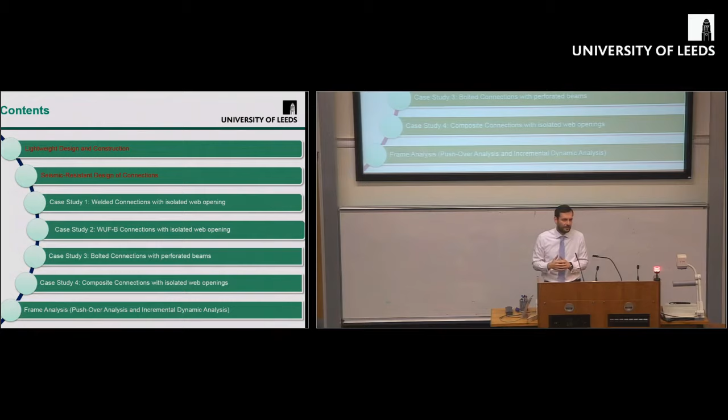I'll try to keep to the surface of the research and not go into great depth, but get the main message out of it. The contents of the presentation, I will try to engage two different concepts. I will start from the design of perforated beams in lightweight construction, and then bring into the discussion the seismic resistant design of connections. I'll try to engage these two through four different case studies, and then conclude with some main messages that we have at the moment.

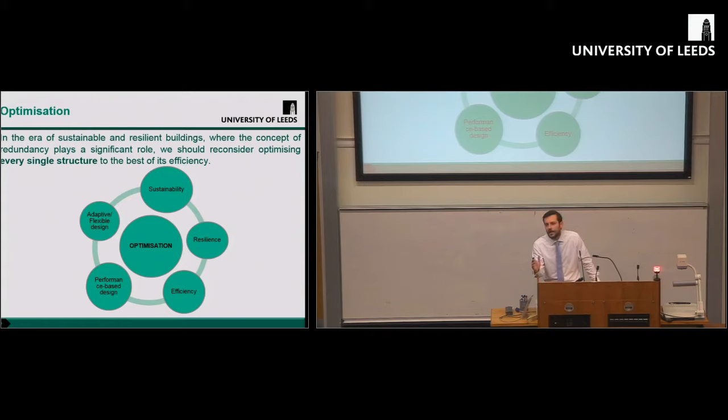Obviously, all that is ongoing research, so there's much more to be done in the future. It's quite interesting to see that the last decade or so we have introduced quite a lot of interesting words in our vocabulary, such as efficiency, performance-based design, sustainability, resilience. In fact, we live here in the Institute for Resilient Infrastructure, adaptive and flexible design. All these keywords, to me, translate as optimization. What we're trying to do all the time is optimize the performance of the structure in terms of structural performance, economy, cost, efficiency, as well as the manufacturing performance of certain members. So it's about different criteria that we try to optimize every single time.

Being myself a structural engineer, back in 2005, I started working on perforated beams a lot because, as I said, being a structural engineer, not a material scientist, I was focusing on the topology of the material in order to improve the structural performance of certain members. So how we can make sure that we have light members which are very stiff and very strong.

I don't think I have to go really thoroughly about the advantages of using perforated beams, but for those that haven't used them so far and are mainly focused on concrete structures, the main advantage is that we can integrate the services through the beam, meaning we decrease the structural depth per floor, so the floor to ceiling height is decreased, and by that 10 to 15 or 20 centimeters decrease of the structural floor, we can gain extra floors when we multiply across the number of floors in the building. So that's the main great advantage. But at the same time, we can have longer spans, meaning less columns, less foundations, less maintenance.

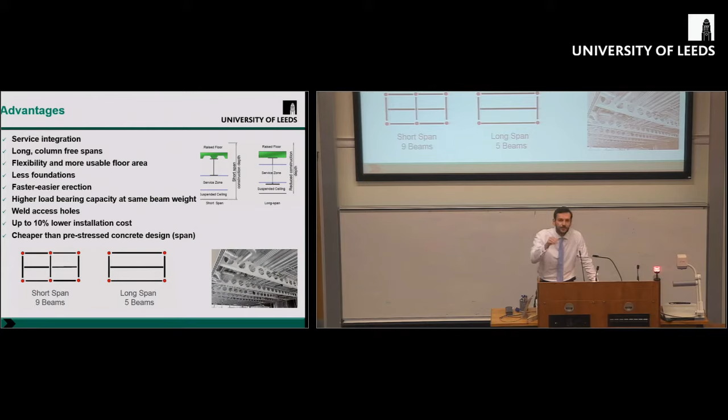There are some studies that compare the performance in terms of cost of perforated beams with pre-stressed concrete design, and we can certainly say through these studies that we have managed to achieve a cheaper design. The installation cost becomes cheaper because of the light members. A very good point also is that having this opening on the web of the steel beams, we have access for maintenance as well as for welding, which is not the case when we have huge plate girders with a solid web.

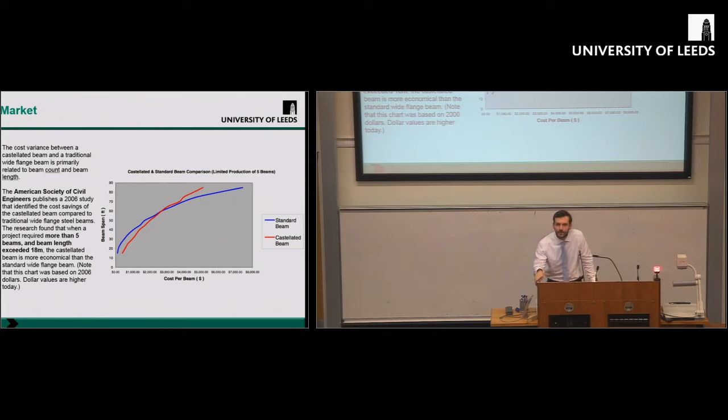Now, back in 2006, the American Society of Civil Engineers published a very interesting study focusing on the performance of castellated beams, so perforated beams with hexagonal openings, and they said that once you can count the number of the beams in a project, and if those beams span more than 18 meters, then you have an economic design.

A more precise study came up later that same year looking at groups of hundreds of beams. If in a project you have more than 100 beams that need to be perforated, you drop the cost of the structure significantly. Again, around 12 to 15 meters span is ideal for perforated beams. If you need something more than that, and you need a lot of them, it's definitely the most economic solution, because everybody wonders whether perforated beams actually boost up the cost of the structure.

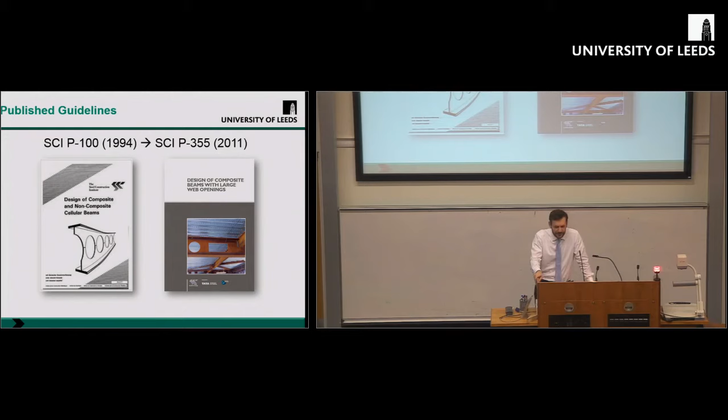But that's not the case according to the American Society of Civil Engineers. A lot of study happened in the past, and in 1994 SCI, the Steel Construction Institute, published the P100 publication for the design of composite and non-composite cellular beams. More recently, after a lot of work we've done, the design of composite beams with large web openings has been published.

Since 2006, all that information triggered my interest a lot, and I started working really effectively on the design of perforated beams with standard and non-standard web openings. I was looking closely at spaced openings, really large diameters, and all the different failure modes associated with the design of perforated beams. We have to appreciate that there are two or three extra dominant failure modes when we introduce perforated beams into our design.

Trying to understand what is happening in the vicinity of the openings, we're looking at all the stresses, but the aim was always to introduce all that material into design codes so practitioners can use them. At the end of each study, we produced shear-moment interaction curves, so practitioners can go straight away and use that information to design their own beams.

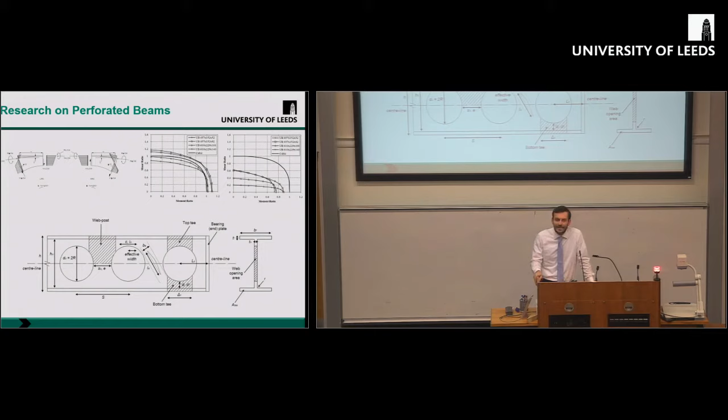One extra thing we had to make sure was very clear coming out of all that research is identifying the key geometric parameters that affect the behavior according to the failure mode we're looking at. Because there are a lot of parameters, as the SCI P355 document characterizes perforated beams. It says it's a very complex design with a lot of associated failure modes. We had to make sure we understand the best of its design.

Going a little more in depth into what happens with perforated beams, we're always looking at the formation of plastic hinges. The black dots you see there are the plastic hinges concentrated in the vicinity of the opening, all around that edge. When we use the old design of castellated beams, the position of the plastic hinges is standard, always at the corners.

When we introduced the design of cellular beams, perforated beams with circular web openings, it was really interesting to see that the position of the plastic hinges was changing, which makes our design much more difficult. That's why we called the distance between the top plastic hinges of the top T-section the critical opening length, exactly as the P355 also calls it. You can find that denoted as c or l0. We need to know that position of the plastic hinge, because then you can work out the capacity of the perforated beam's cross section at that location.

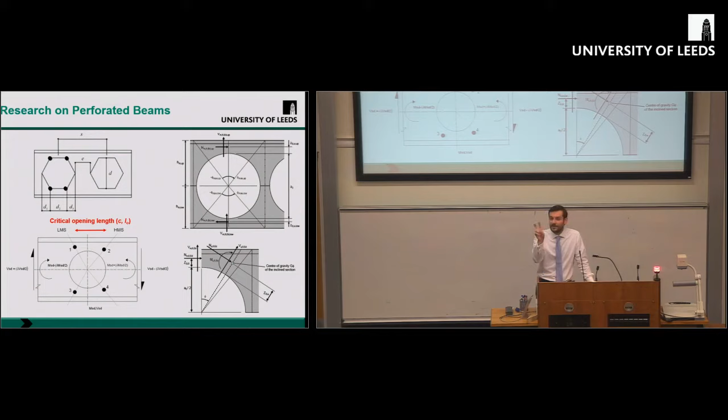Something we can observe straight away from this picture is that the position of the plastic hinges in the bottom picture, dealing with the cellular perforated beams, is not symmetrical. Along the central line, the position is not the same. In fact, as you move the opening along the length of the beam, changing the shear-moment interaction, those angles do change. That makes our design even more difficult.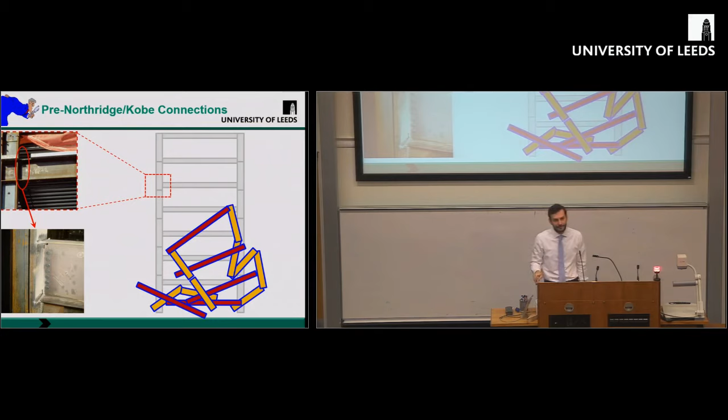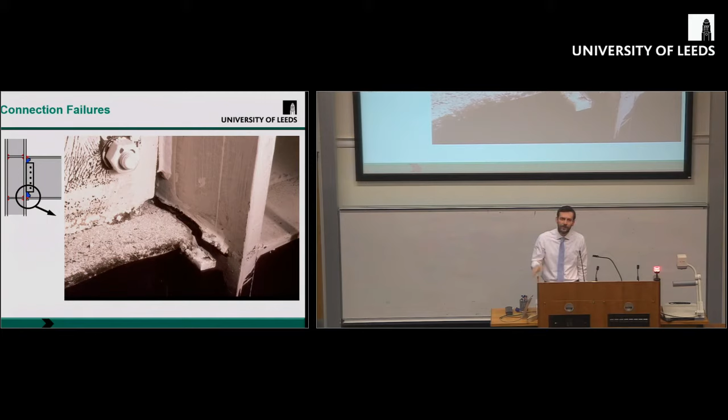And even more in detail, what failed first was the connections, the welding, which was in the compression zone. So they started investigating many different types of connections found in those already damaged buildings, and they found huge cracks along the length of the welding, not only in those subjected to compression, but also those subjected to shear. And those welds, you'd assume, shouldn't fail.

It was even more interesting that, in fact, we got failures from the zones in the vicinity of the welds. As you can see in this example, the weld has not failed, but the heated zone around the weld has failed. So that triggered more research in order to understand what's happening.

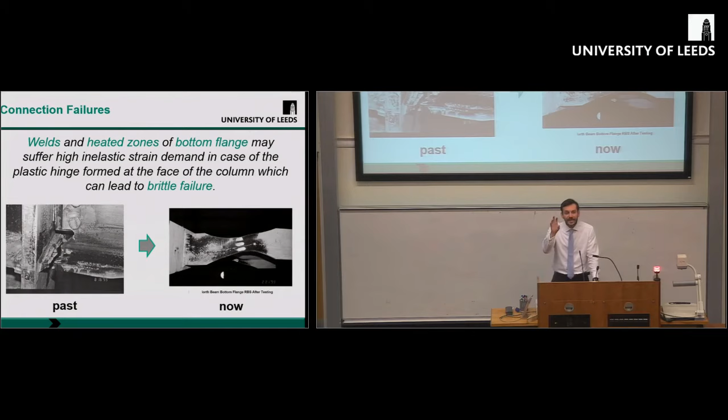So the main conclusion from the SAC investigation, which lasted more than 5 years, was that the welds and the heated zones of the bottom flanges were subjected to high inelastic strains, which take place mainly in the face of the connections, in the face of the column flanges.

Hence, we had to introduce the ductility concept in our documents. So instead of designing something like that, we had to move to something like that. That means you need to reduce the capacity of the building, which is not always ideal. And in reducing the capacity of the building, you have to increase the ductility. You in fact increase the ductility.

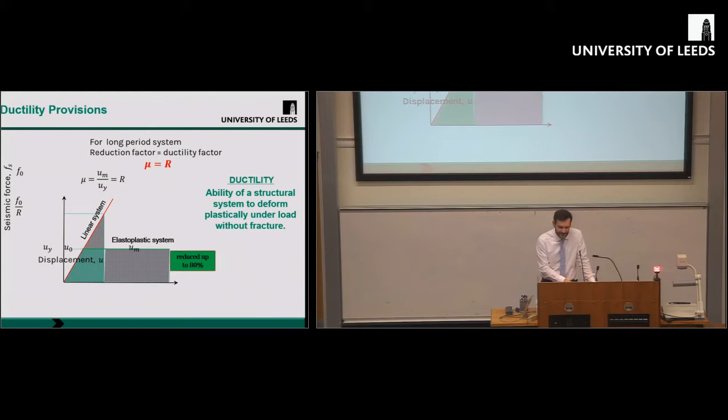So this reduction factor R is in fact the ductility factor that you need to be using in the structures. In certain cases, we have to reduce the capacity of the building by 80% in order to allow for that ductility.

So the potential plastic hinges that we have, as we all know very well, in the connections are either very close to the connection at the bottom side on the column web, and in that case we get the well-known failure mechanism called story mechanism, or story drift, or soft story.

In the case where the plastic hinge is formed in the web panel zone of the column, then we have shear yielding of the connections, and most likely we will have failures of the components of the connection.

And in the case we have the plastic hinge at the face of the column, as we saw previously, we have a more desirable failure, as long as that plastic hinge is away from the actual components of the connection, such as the welding and the bolts and all the other clips, plates or splices that we use in our particular connection. So the idea is to move the plasticity away, mobilize it away from the connection, somewhere around the beam. Obviously we cannot move it far away, but we have to be very precise about what that end distance is.

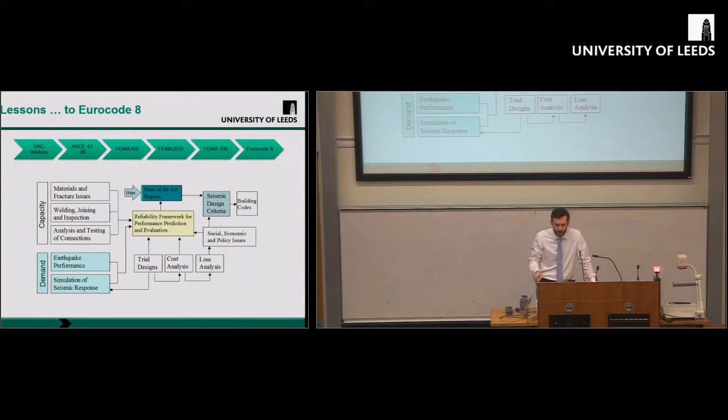So as I said, the SAC Joint Venture came up with a whole new methodology for how we should approach steel structures when we design them for seismic actions. They introduced a number of state-of-the-art reports, produced after a lot of tests, a lot of finite element analysis, and a lot of reliability investigation. We had to make sure that all these things we were producing covered the whole range of connections and specimens that we may have.

Accordingly, the design criteria have changed. These are the FEMA publications that came out around 2000, the first ones published, and since then we get more and more of them. Some deal with moment frame buildings, some specify rehabilitation and strengthening techniques, and so on and so forth.

More recently, that information was introduced into Eurocode 8. It's not there yet, not completed, but most of the information is coming along. What that tells us now is that we should not treat our structures elastically, but we should check the hysteretic behavior of the structures. It's extremely important, and we should have some dissipative parts in the structure as a passive mechanism to allow stresses to concentrate and dissipate the energy coming from an earthquake.

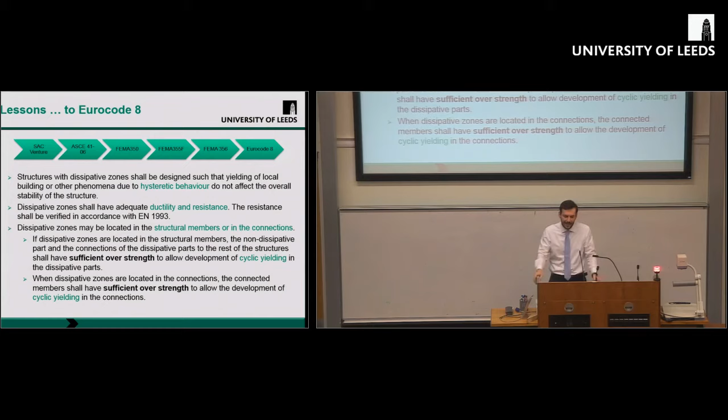Now, these dissipative parts may be either the structural members or the connections. In the case that the dissipative part is the structural connection, then the members around it should be overstrengthened, and vice versa—if we allow the dissipative parts to be the members, then the connections themselves should be overstrengthened. So that is the main lesson we learned through all these investigations, and what Eurocode 8 is proposing to us nowadays.

So the rehabilitation methods that are proposed by FEMA, first of all, is what else? By strengthening our connection. So start adding plates and welds and stiffeners to make our connection stronger. But there is also the opposite concept, which is making some of the parts of the structure weaker.

How we cut some parts of the flanges, and I'm sure that you all know the RBS connections, the reduced beam section connections. Much more recently, I would say after 2010, 2011, the first investigations came to light where people are actually cutting part of the web to mimic what the RBS connection is. But things are now changing because, in fact, we cut a completely different part of the beam.

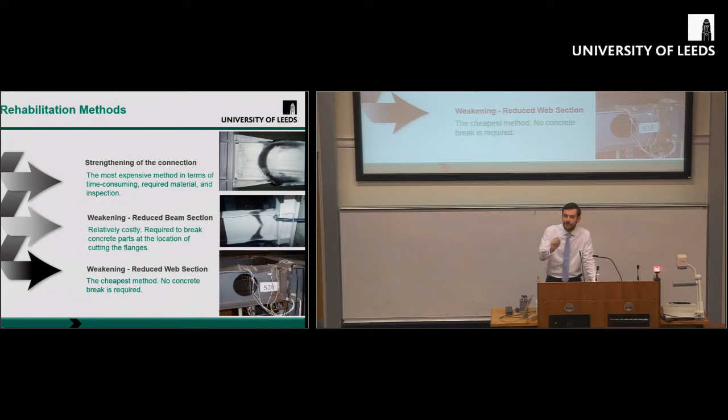In the case of weakening between RBS and RWS connections, I would say the price is pretty much the same. There is a slight difference, obviously, in the way that we cut the flanges and the webs and the precision that we need. And that's why I would say that the RWS connection is slightly cheaper than the RBS connection.

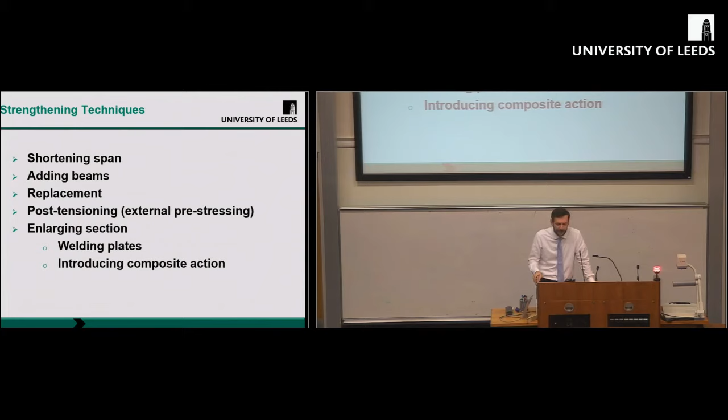Other strengthening techniques are shortening the spans, adding beams, replacing members, or adding post-tensioning using external pre-stressing, enlarging sections, as we said, increasing the welding again, which is not ideal. As we said many times, we don't really need that welding.

FEMA 350 particularly came up with numerous different design connections. To some of them they give some funny names as well. In all of them, they are bespoke designs, so you have to be using them in particular applications. You cannot really use them globally.

So coming back to EC8 and RBS connections, those are the ones that now have the priority to be introduced in Eurocode 8. So we did some other investigations also to make sure that the UK sections and the European sections will also follow all these observations that we had from the American sections.

But I would like to highlight three things that we have to consider when we use RBS. First of all, the cutting of the top and the bottom flange should be very accurate. In the case that we have some eccentricity between the cutting of the top flange and the bottom flange, we have straight away some out of plane movements after this zone is stressed. So that will lead to lateral torsion buckling, and we will not be able to dissipate the energy we want because of the lateral torsion buckling.

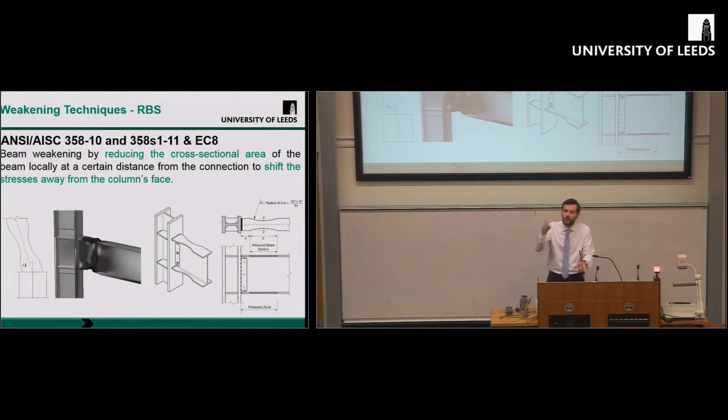But most importantly, the problem that we find out is that you lose the shear, the horizontal shear interaction between the metal deck and the concrete slab and the steel flange, because you're reducing the flange part. So you're reducing that shear interaction. In fact, what the American codes propose, but a lot of designers haven't really noticed because it's just 3 lines, is that the space where you connect the concrete and the metal deck to the beam, you should not allow for shear interaction. So you should assume that there is no shear interaction along that zone. Meaning that the whole calculation finding what is the shear connection between the slab and the steel becomes more complicated, because you've lost that part.

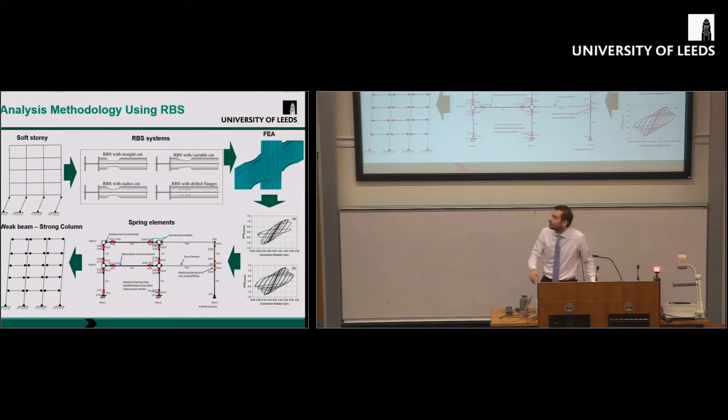However, we have seen different designs of RBS, so people have different kinds of cuts on the flanges. The methodology we use at the moment is you run a finite element analysis or an experimental result, produce the moment rotational curves, and introduce these properties through spring elements in your structural model. Then you come up with a solution which should look like this, so you get plasticity distributed in all the beams, instead of plastic hinges on the columns and inter-story drift, where the buildings tilt and collapse completely.

So if I do a quick comparison between RBS and RWS, in RBS connections the shear capacity is not reduced, because you haven't lost anything from the web of the beam. However, you have lateral instability problems, and the time and cost for rehabilitation is quite expensive, because if it's an existing structure and you rehabilitate after an earthquake, cutting those flanges while you have the concrete and metal deck on top is not as easy as it sounds.

On the other side, when we have RWS connections, they are much easier to cut - just drill a hole on the web. There is very good shear interaction; you haven't lost your shear interaction between the steel and the concrete. You can have that opening accommodating services, and providing maintenance and access. So there are some advantages that come from perforated beams to the design of RWS connections.

Because of that, we went through certain studies. I will be looking at 4 different types of connections, starting with a fully welded connection using isolated web openings. We found an experimental setup from the literature review, and used that to validate our finite element model. We always use the SAC protocol, the loading protocol for moment resisting frames from FEMA 350, and we found that our model behaved adequately. Then we produced a parametric study, changing 3 parameters: the web opening shape, the depth of the web opening, and the distance of the web opening to the face of the column.

Getting the big picture, trying to show a few things overall that we managed to gather from these results: when we used the novel openings as opposed to circular openings, we get quite similar results every time. That's good, because the results are consistent. However, when we use circular openings, while changing the opening dimension, we get quite different behavior.

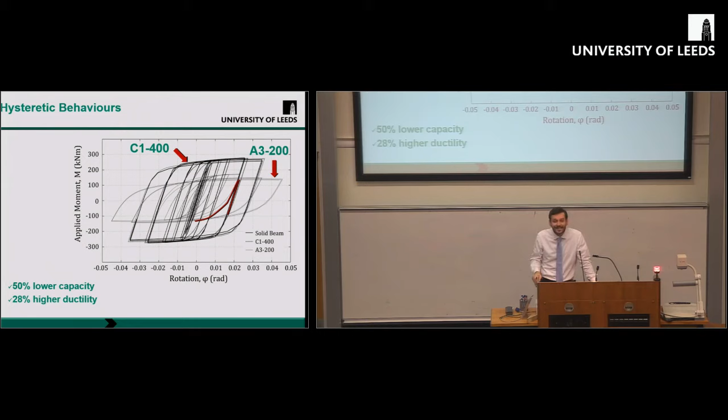What is important, in fact, is to relate how much stress will be moved from the connection to the plastic zone, how much ductility we'll gain, and how much capacity we'll lose. Relating capacity to ductility is very important, and we have done numerous repetitive calculations to check how these two relate to each other, and whether there is a linear or non-linear interaction. We can certainly say at this stage, through that experiment, that when we reduce the capacity by 50%, we gain 30% ductility.

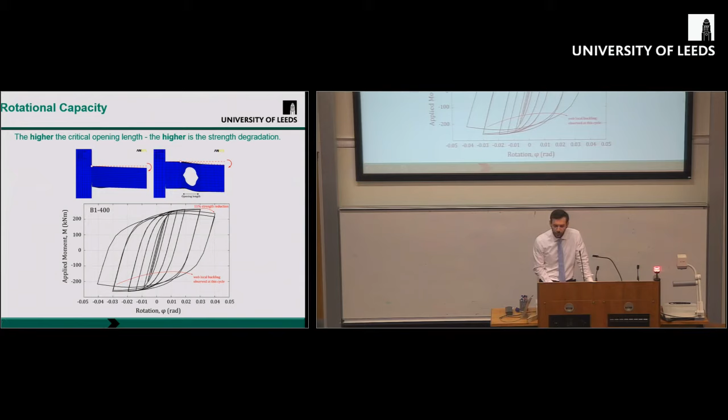Another very important comment was that the critical opening length plays a significant role in the behavior of the hysteretic response of the connections. The bigger the critical opening length, the more strength degradation you get once you run the hysteretic behavior - getting worse as the critical opening length increases, which is not good for RWS connections using circular openings.

Comparing the plastic hinges and the order of their formation, we were very pleased to see that in all scenarios it happens in the same order, so we're not jeopardizing the knowledge that we already have for cellular beams.

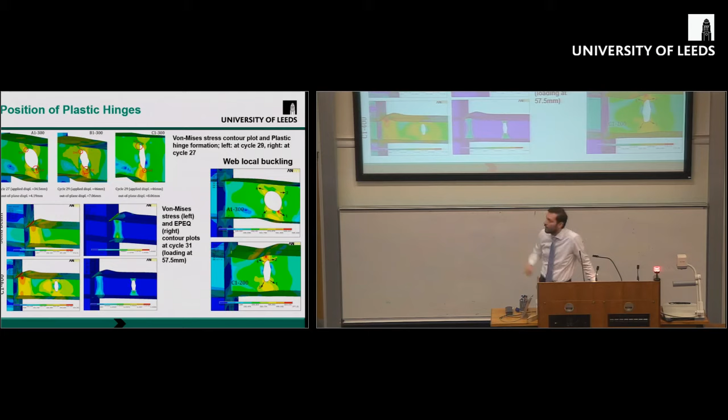A great example is the one on the left, where although there is an opening, because it's small and positioned away from the connection, there are no different stresses in the vicinity of the connection. You get exactly the same amount of stresses at the critical zones, meaning that if that opening is small and away, you're not actually designing an RBS connection.

Something that was a surprise is that the web opening area does not play a significant role in the ductility. It doesn't really matter how much is the web opening area, what matters is the critical opening length. You can see, for instance, the rotation ductility of two different beams with completely different web opening areas.

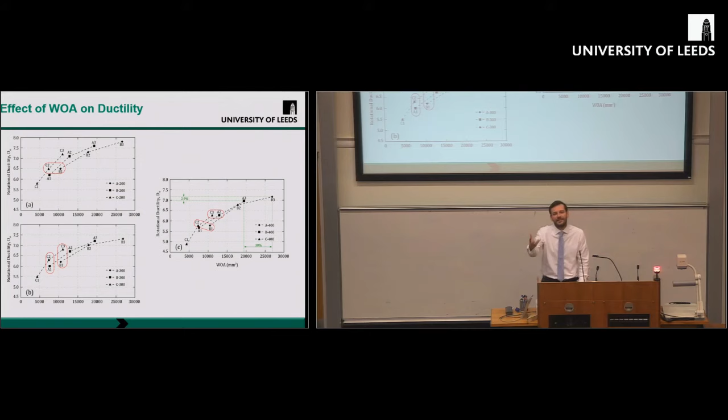It's 50% higher for the B1 case, but both give us exactly the same rotational ductility. On the bottom picture you can see two completely different web opening shapes that give the same web opening area, but a completely different rotation ductility. So the web opening area is not the dominant parameter, and we had to clarify that because people always talk about the amount of material removed and try to correlate results with that. But it's not the amount of material, it's the location of material which is most important - for our case, it's C, the critical opening length.

Getting the big picture, I'll go to the highlighted examples. This particular one gave us the highest rotational capacity, compared with the lowest rotational capacity, which comes from the connection having a solid webbed beam.

More interestingly, we'd like to see what is happening in the moment capacities. We can see that 278.2 has been reduced to 135.6, meaning the capacity has been reduced to almost half. That 50% reduction of capacity gave us a 31.6 increase in rotational capacity. So that figure, the 50 with 30, comes up as the most robust figure that we have at the moment: you reduce 50% the moment capacity, you increase 30% the rotational capacity.

So if I can synopsize all the parameters we played with: parameter denotes the depth of the opening - the bigger it is, the more likely you get the Vierendeel mechanism, and then you reduce the stresses from the joint. Oppositely, the parameter S, the end distance - the smaller the S, again you increase the possibility of getting the Vierendeel mechanism, releasing the stresses from the joint. We propose some openings for these particular connection types.

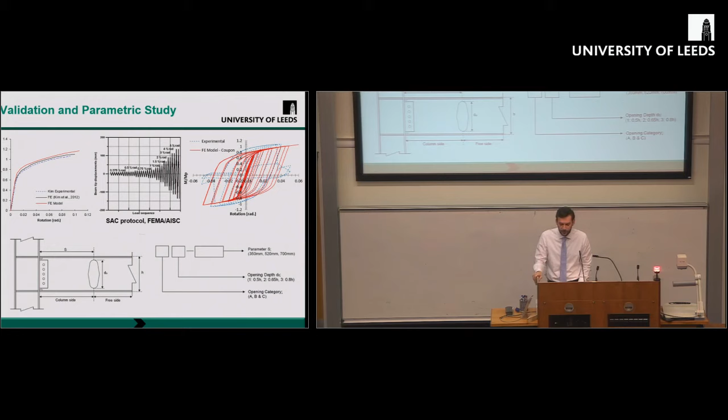Now we also looked at some non-RBS connections, the welded unreinforced flange bolted connection, WUF-B, as well-known ones. Same one, I'll skip through the slides quite briefly. Same similar connection type, different connection type, similar methodology. We again used the SAC protocol and ran the 32 cycles. We validated our models and did the same parametric study.

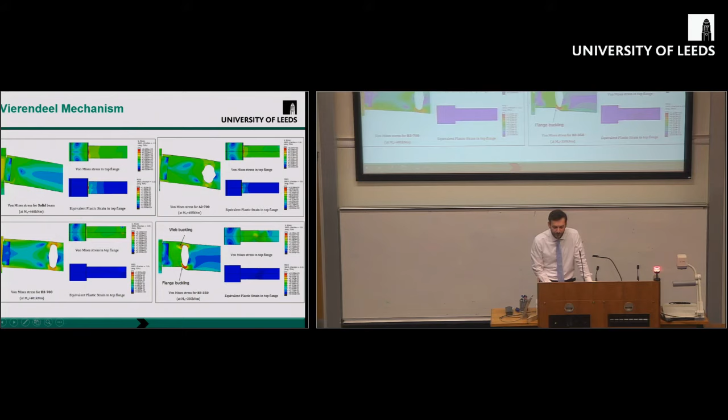Again, when we compare the one on the bottom right to the top left, with one of the novel elliptically based web openings, we can certainly see there are some failure modes in the vicinity of the opening, like web buckling and flange buckling, and because of that, the stresses in the shear panel zone have been moved away. So the column, we expect, will behave linearly.

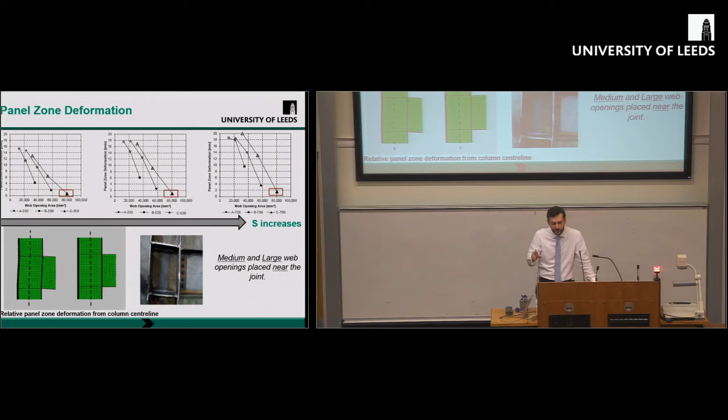Similarly, we looked at the panel zone deformation, and we found that the ones at the bottom are the ones with the biggest web opening. There was very minimal panel zone deformation. So the message coming up after this investigation was that if you use medium and especially large openings near the face of the column, then most likely you will not have any problems with the shear panel zone.

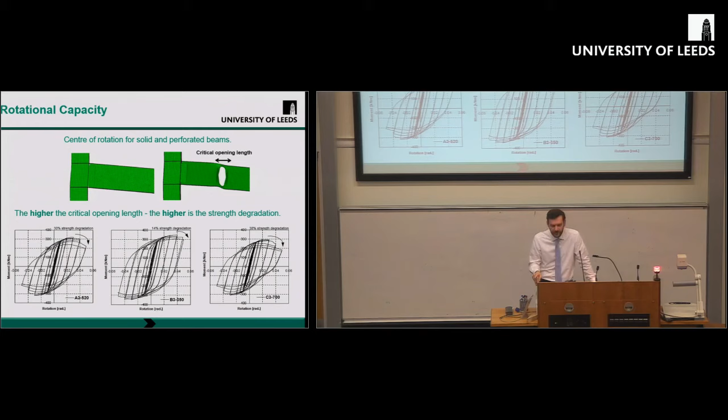Again, the critical opening length is very important for the strength degradation. The higher the critical opening length, the higher the strength degradation that we observed.

Similarly, getting the same picture, we saw that different scenarios may give us different results, but we can identify from the very beginning what is happening in terms of ductility.

I have highlighted that all the models we've run, when compared with the connections using solid beams, showed that the maximum panel zone deflection was reduced slightly or quite significantly, depending on the connection. But the worst case scenario was always the connection without any sort of opening.

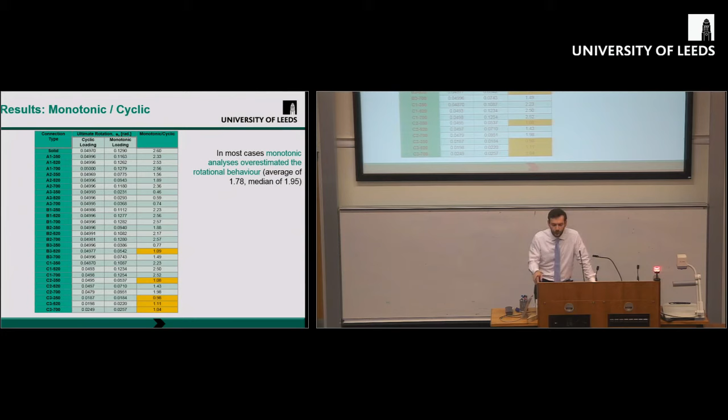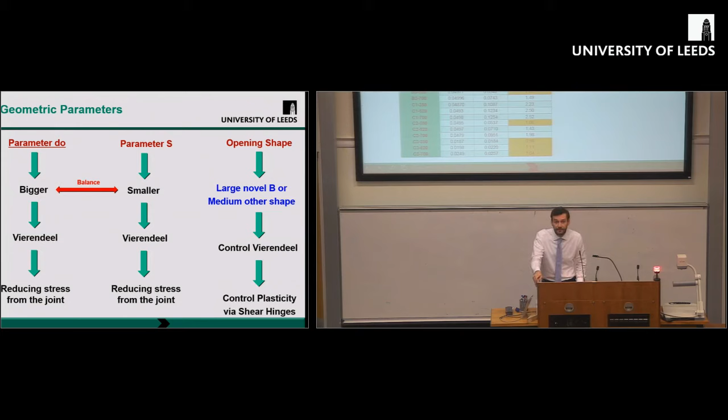Again, if we were trying to correlate the monotonic with the cyclic, we found that the monotonic analysis in most cases overestimated the rotational behavior, which is not good. We have to make sure that we run the cyclic full hysteretic performance. Same picture as before, the only difference is that for these types of connections we're proposing different openings to be used as the ideal ones.

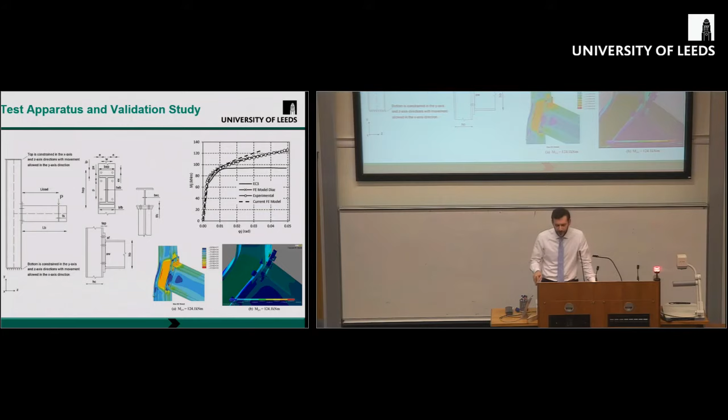Looking at the bolted connections with isolated as well as fully perforated openings, we again found an experimental work from the literature review. We validated our models, then used the elaborated model to do the parametric study and come up with all the conclusions. We had discretized everything, all the components of the connection, including the welding and contact elements.

It's worth mentioning that these connections, when you run a full hysteretic behavior - which means 32 cycles, 64 monotonic analyses - with all these discretized models of the bolts, the nuts, everything, you're increasing a lot the time of the analysis. We're talking about an analysis which may run for a week or two on a high performance computer by the time you press the button. So it's very time expensive analysis.

That's why we have to make sure we understand what's happening and then propose design methodologies so practitioners don't have to go through that process.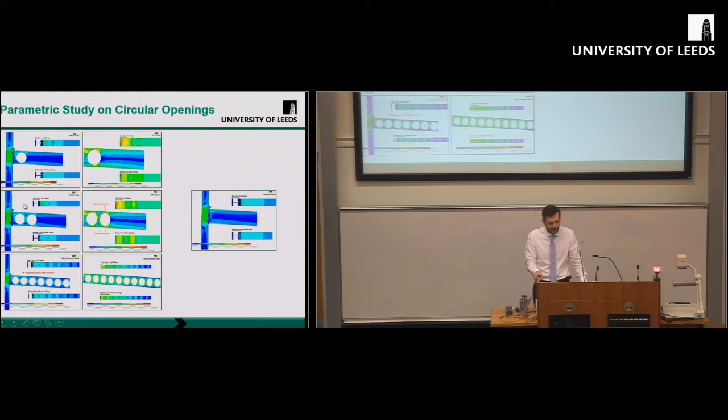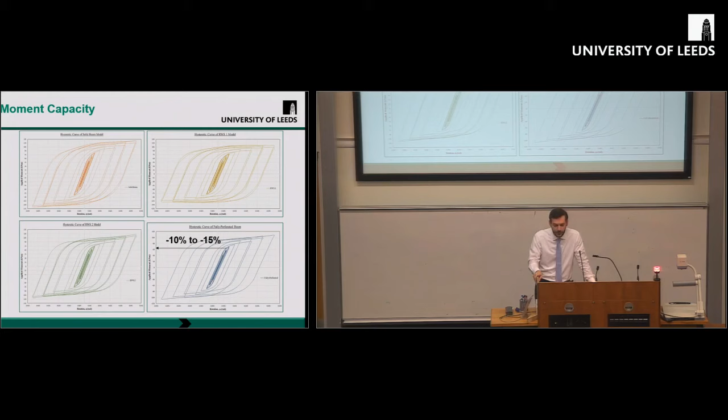As I said, we looked at isolated openings as well as two openings next to each other, very closely spaced, and also the fully perforated beams, comparing everything with the connection using solid beam. The global picture looks pretty similar, which is in fact very good, because we can certainly say there's nothing hidden missing. We got similar behavior, but in the case of fully perforated beams, in that particular design with that particular connection, the capacity was decreased by 10 to 15%. That was one of the messages from that study, which looked at around 20 different models.

Then we tried playing with the parameters. We had a beam with fully perforated openings, and the part of the beam was moved quite away from the connection to see what would happen. You can see there is no energy dissipated in the connection, so very few stresses concentrated in the vicinity of the connections. No plastic hinges are formed in the edges of the openings. Those particular ones failed in lateral torsion buckling. The energy, as I said, is not dissipated, and the capacity is very low.

If you use perforated beams and try to move the first opening away from the face of the column, you're not really designing an RWS connection. When we moved the first opening closer to the face of the column, the capacity was increased and we dissipated some energy. So now it's pretty clear what we need to do to control that plasticity, and which positions, sizes and shapes of web openings to look at for precise analysis.

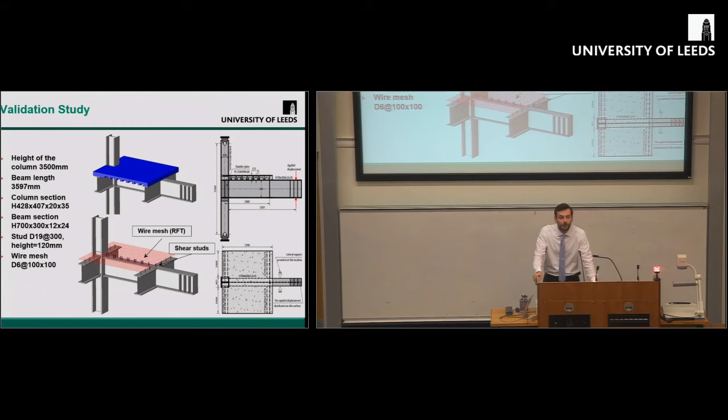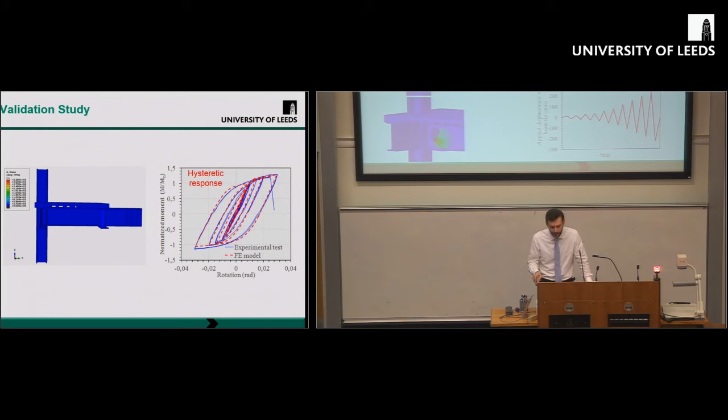We ran another protocol from Eurocode 4, which also complies with the American Institute of Steel Construction, and found that our model behaves very similarly to the experimental results. We looked more closely at how the concrete behaves, and found that our final model precisely demonstrates the cracks and crushing we get in the concrete.

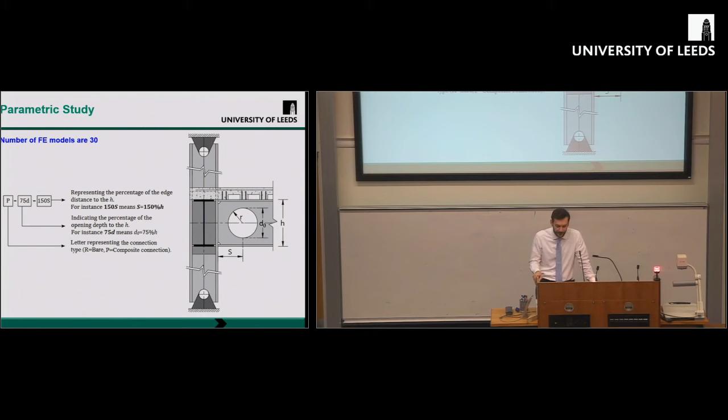We then ran a parametric study of 30 models. In this case, we only changed the edge distance S and the depth of the opening, but the shape of the opening was always circular. We ran everything as composite and non-composite to see the interaction of the concrete and whether it changes anything in our design. What you see here are pairs of the same connection, the left side being non-composite and the right side composite.

Surprisingly, we found that although the concrete helps increase the capacity of the perforated beams, it doesn't really help the effectiveness of the RWS connections. Because of the concrete's presence, the stresses were distributed into the shear panel zone as well, and fewer stresses concentrated near the opening, which is the opposite of what we were trying to achieve. That was really interesting.

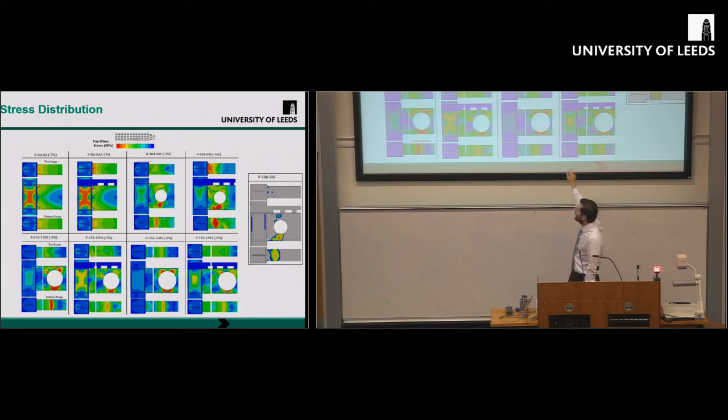As we continue the analysis, you can see straight away, for instance in this example, that the shear panel stresses have been mobilized effectively in the vicinity of the opening. Once you have the composite action, there are fewer stresses there and more stresses in the shear panel zone. That's a critical point, because we will always have a downstand beam with concrete on top, so all the knowledge we've gathered, the software, and the design methodologies have to be adjusted for composite actions.

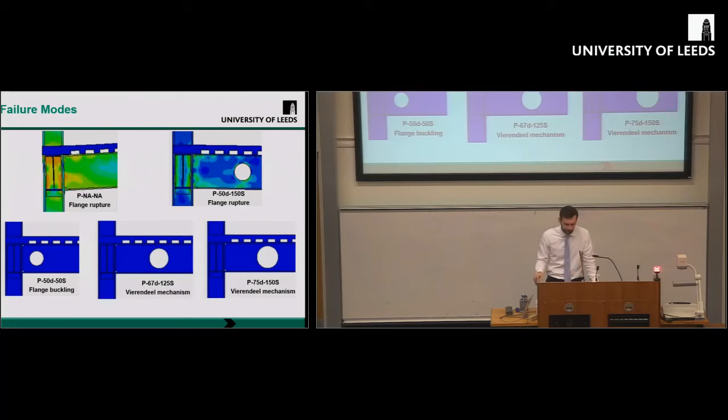We looked more precisely at what happens when there are no openings at all, and how stresses distribute near the connection, compared to when there's a small opening located away from the face of the connection. As we anticipated, there wasn't much difference between the two.

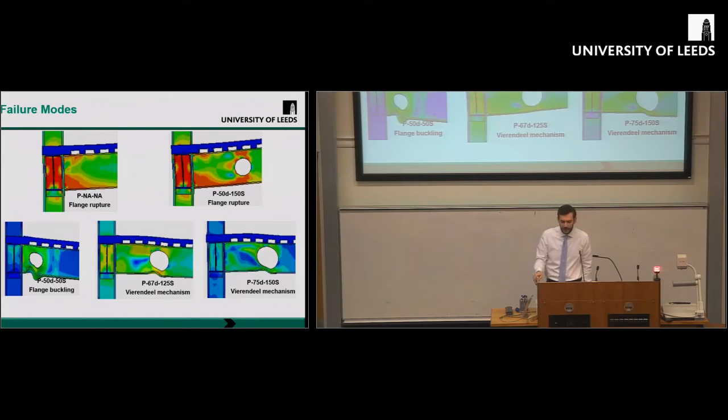However, when we moved that opening close to the face of the connection, very close to the column, we got a flange buckling mechanism forming. With slightly bigger and even bigger openings at a fair distance from the end of the connection and the face of the column, we got another failure mechanism. This tells us we have to be very precise when combining these dimensions and geometries—either the distance S with the diameter of the opening, or the shape of the opening with a specific critical opening length relative to distance S.

As a result of that study, in terms of composite contribution, we gained up to 65% in the positive direction.

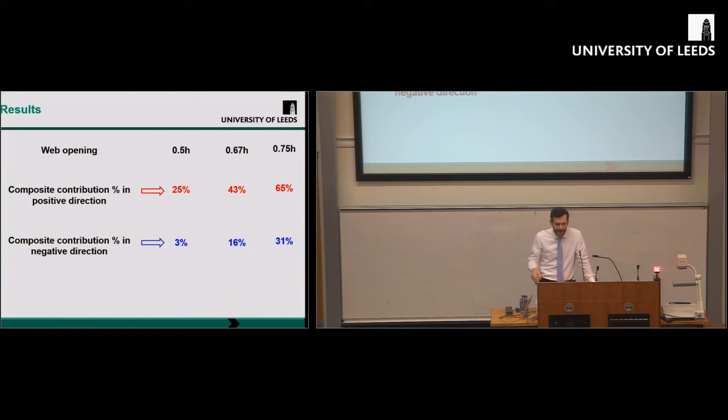In terms of the capacity of the connection, it was increased as expected, and in the negative direction was up to 31%, with not much difference when we had very small openings.

As the protocol, the SAC Joint Venture is actually proposing, we should also do all this analysis on a frame. So we ran pushover analysis, non-linear static analysis, and we also looked at the incremental dynamic analysis to replace the full time-history dynamic analysis.

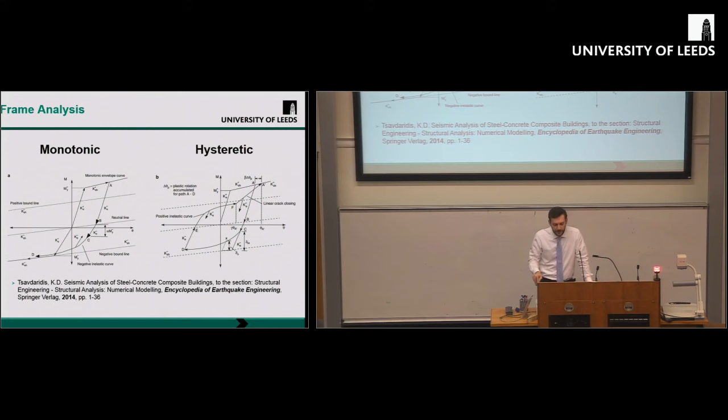We used a particular footprint of a building that we found in the literature was used extensively, with 4, 8, and 16-story versions. Then we came up with a moment-rotation curve for the monotonic and hysteretic model, using both composite and non-composite scenarios.

We ran 20 different earthquakes with magnitudes from 6.5 to 7.5 on the Richter scale, real earthquakes that happened in the past, and produced the incremental dynamic analysis curve. We're talking about 4,500 dynamic analyses, which produced 120 IDA curves.

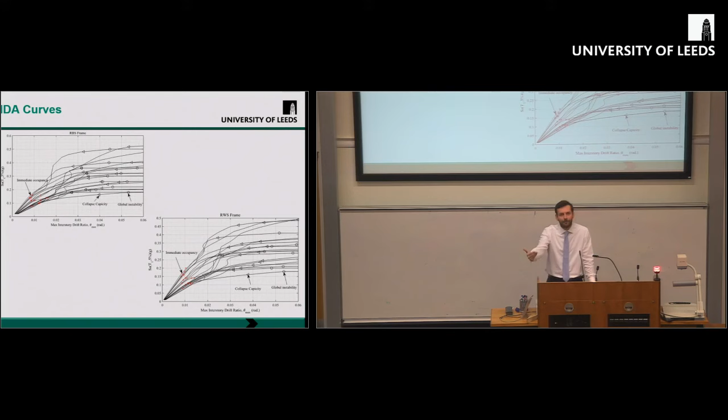So a lot of work behind this research, and we were very pleased to see that the behavior between the RBS and RWS frames was quite similar, because that means we can introduce our RWS connections and the connections using perforated beams into Eurocode 8, which at the beginning seemed unlikely.

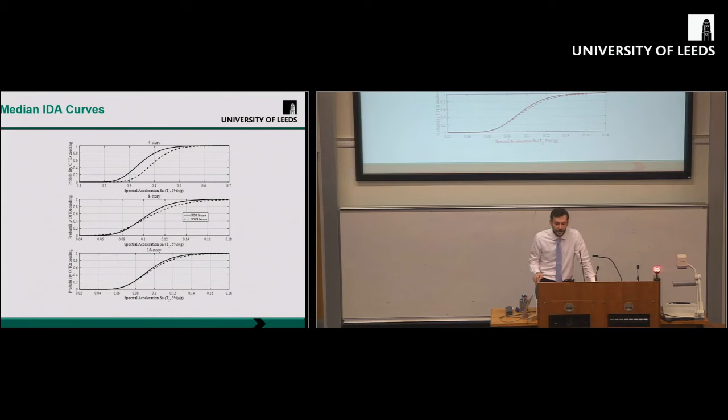When we looked at the probability of exceedance of all these results, trying to understand the spectral acceleration with 5% damping in this case, we can see that certainly for the first scenario, the 4-story buildings, the RWS frames behave much better than the RBS.

The RWS is better. So the highlights of that long study are that in the elastic region, RWS and RBS connections behave similarly.

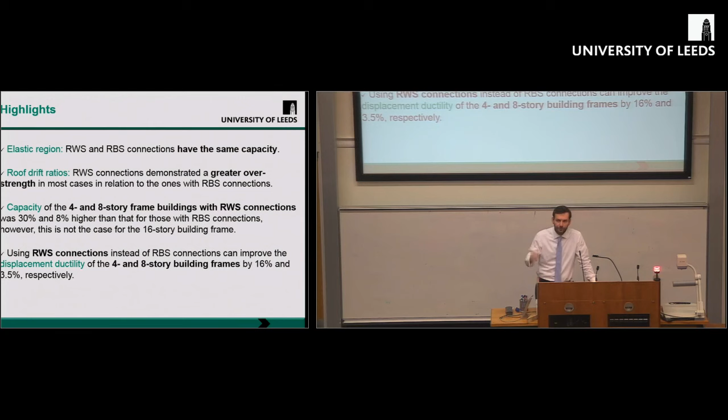When we looked at the roof drift ratios, the RWS connections demonstrated better strength performance. In terms of capacity and displacement ductility, RWS connections are ideal for low-rise buildings, 4 and 8-story in our case, and for 16-story buildings we could use RBS instead.

All that work, we have tried to come up with some design recommendations, to make it simpler for practicing engineers, the ones that want to design such connections.

So we started looking at exactly what Eurocode 3 Part 1-8 is proposing, and what the Green Book is proposing, merging that information and adding the extra bits we need in order to account for the perforated beams. The most important check we have to introduce now in our analysis is the one for Vierendeel bending at the reduced web section.

As I said at the beginning, when you move that opening along the length of the beam, things will change.

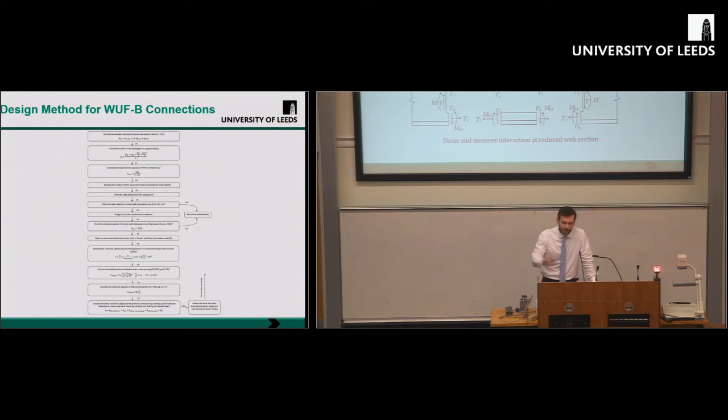So it's a simple, step-by-step methodology that we're proposing, highlighting certain steps. We always start with a calculation of the moment capacity of the reduced web opening section, and we need to find the MPLRD.

We need to work out the plastic moment capacity of the top T section and the bottom T section, and the lever arm between them. Once we have that, we can move on to the calculation of the shear at the web opening center line.

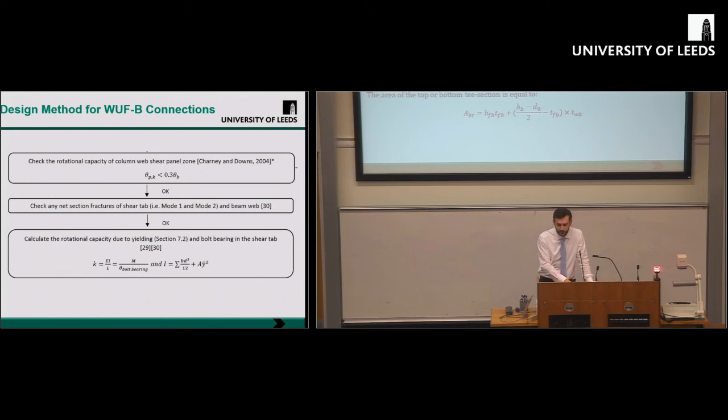P355 actually proposes the methodology for finding the plastic moment capacity at the reduced section, so we can adopt that. Then we have to work out the rotational capacity of the column web shear panel zone. Moving further on, we calculate the rotational capacity due to yielding and bolt bearing of the shear tab.

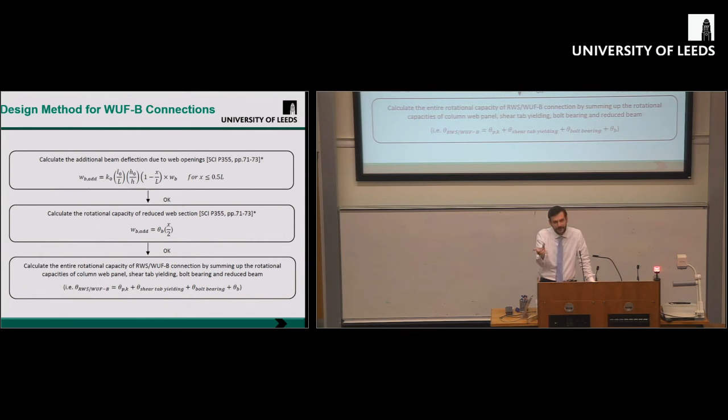Very important is the step where we calculate the additional deflection due to the existence of the opening, especially if these openings are quite large, as we get quite a lot of local deformation. We have to calculate that local deformation and add all these local deformations due to the number of openings, if it's a fully perforated beam. As a last step, we work out the rotational capacity of the entire connection by adding all the rotational capacities that we get.

Synopsizing all the research work we have done so far, and as I said, there is a lot to be done in the future. We can certainly say that large isolated web openings can prevent excessive shear deformation of the shear panel zone, so we can alleviate the stresses from the connection and move them further away towards the beam, effectively achieving a weak beam strong column scenario.

The RWS connections, especially the ones with novel openings, achieved high inelastic rotational capacity, so we managed to reach the 0.04 radians proposed by American codes. In fact, we've reached the 0.05 level, and nowadays we're working on reaching 0.07 radians, which is proposed by the DoD and the GSA in the United States when we talk about progressive collapse and catenary action.

The connections with beams having novel openings behave better compared to circular openings, because we could actually control the capacity, but also they behave better in terms of stress distribution. RWS connections, the ones we examined, are ideal for low-story buildings, at least based on the research we have done so far. This is the message that comes up.

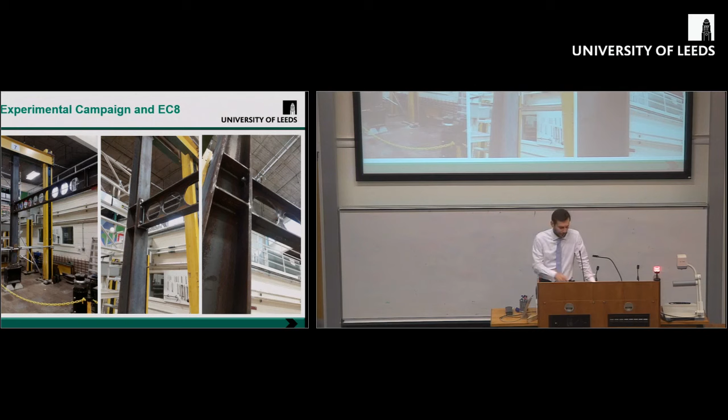A few current projects - we're trying to introduce all that to Eurocode 8. In order to do that, we have to go through experimental work as well, to validate and duplicate our results with experiments, although we have validated the results with experiments that happened in the past by others. So the next 2-3 months, fingers crossed, we will be doing this experimental work, and we'll be able to introduce the RWS connections and the RWS with fully perforated beams into the updates of Eurocode 8 by 2020, I believe.

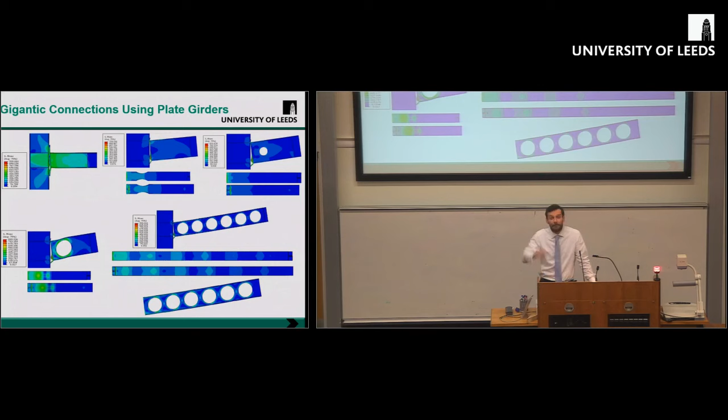Another very interesting study is investigating all that but using gigantic connections, because in connections used in high-rise buildings, for instance, we may have to go for the plate girder design, which has a lot of welding. So all that happens because of the welding problems. We have to investigate all these things again, whether they will apply or different factors have to be used. So some members of my research group work on gigantic connections, very interesting.

And more importantly, the pre-engineered fuse connections. We're trying to make sure that when that part of the beam is stressed a lot locally, it can be replaced after the earthquake event. So we have to make sure there is a mechanism there that can hold the structure, hold the connection, and we can remove the damaged part and put another one - exactly the same with the fuse system, fuse concept.